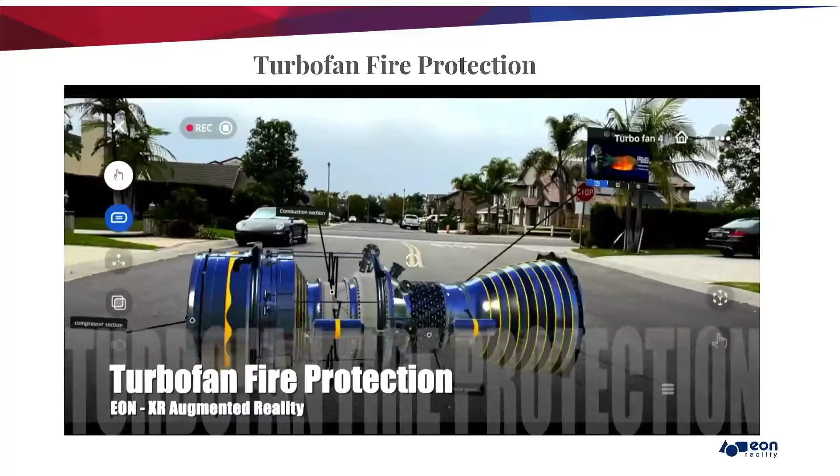So the first thing we're going to show is turbofan engine fire protection. Occasionally something can go wrong with the engine. It can catch fire or give a fire warning to the pilot. So we're going to play this video for a moment. I want you to watch this one.

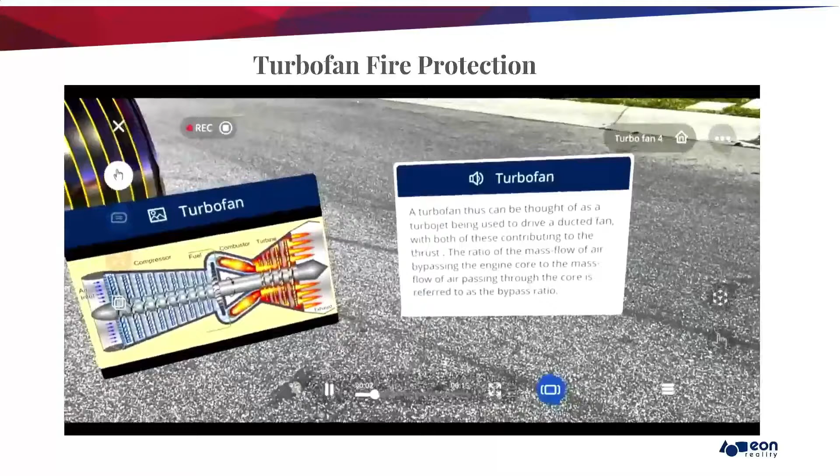A turbofan thus can be thought of as a turbojet being used to drive a ducted fan, with both of these contributing to the thrust.

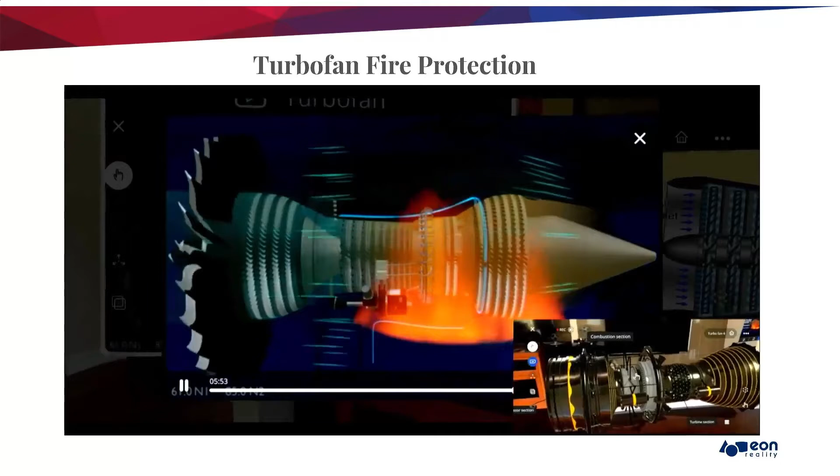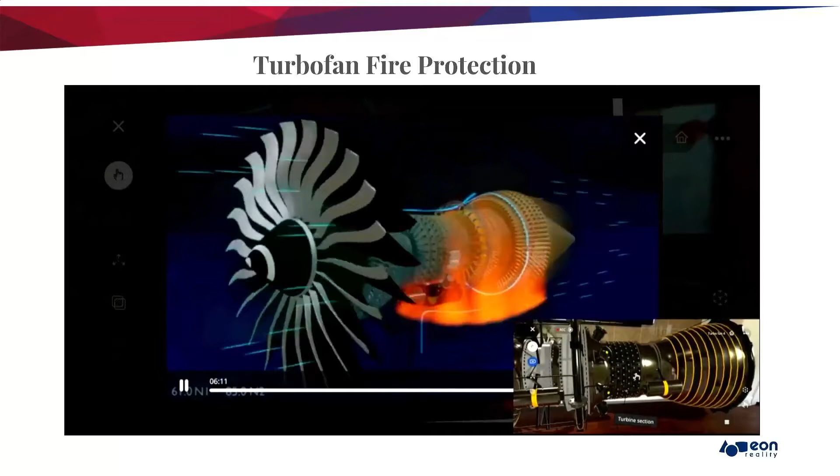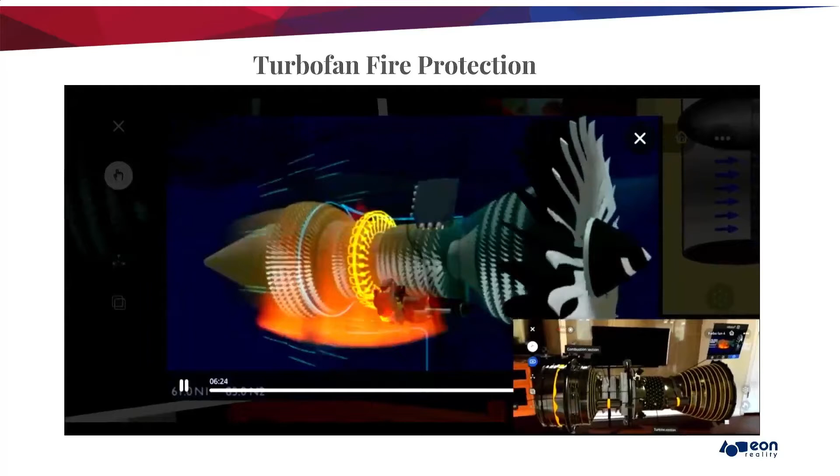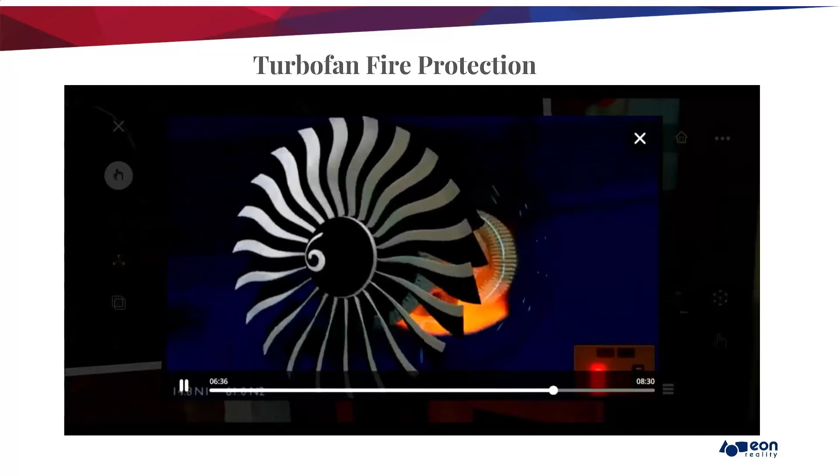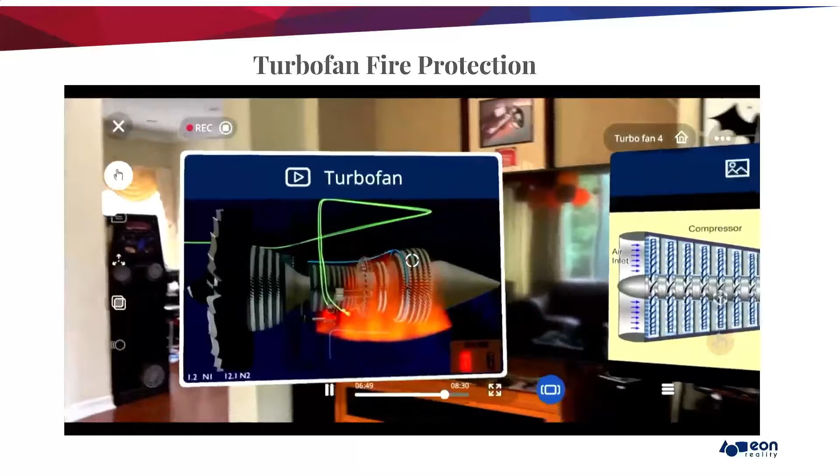Hydraulic supply to the pump is stopped by closing a shutoff valve, and the hydraulic pump is depressurized to stop the output supply. The breakers of the integrated drive generator and the backup generator are tripped. By pulling the switch, the engine is starved of all possible sources that might have caused the fire.

So that's a way of showing a 3D model of the engine and take it apart and show the procedure of what a pilot would do to put out a fire should one occur.

So a fire in any situation, whether it's an engine or anything, you need to starve it of the energy and the source of the fire. So in this case, we shut off the fuel, the hydraulics, the pneumatics, and the electrics. Then the fire is not fed any longer.

If the fire still exists, there's a fire extinguishing system that can be employed in the engine to put out the fire. And I just want to ask you, so for that, how would you look at that now? Is it primarily video or like a book or how?

Oh, it's been a manual. So you read the manual and it says, this is how the system works. You pull this handle and this action occurs. This is the next step and this action occurs. And with this way of learning, it takes you through step by step. It highlights the system that we're talking about so that you don't confuse the electrical system with the hydraulic system with the fuel system. It's clearly depicted. And in the 3D model, you can clearly call that out.

Play the next one. So next slide.

Yes. Oh, a question already. Is that actually directed towards the people flying the plane, or is it directed towards the engineers or future engineers? This would be directed toward the flight crew.

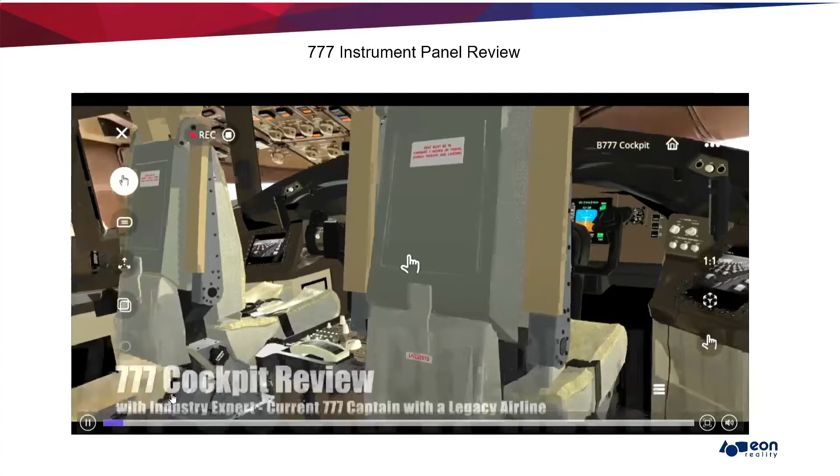So here we have shown a model with... I'm a Boeing 777 captain. In this presentation, we're going to go through the basic layout of the Boeing 777 cockpit.

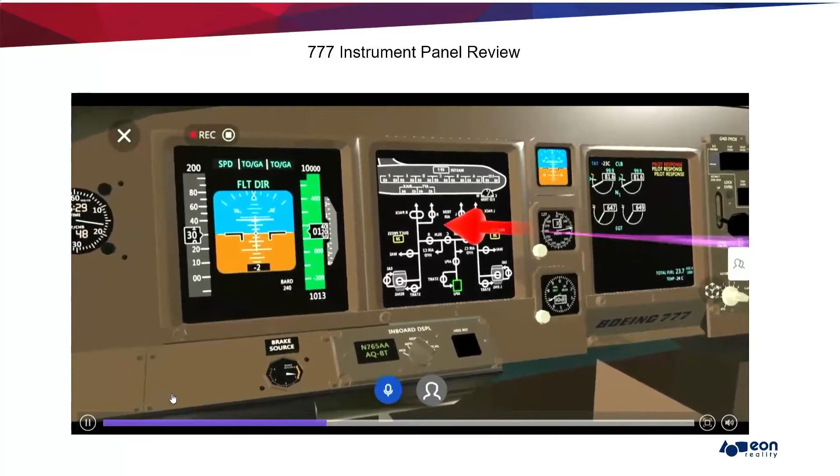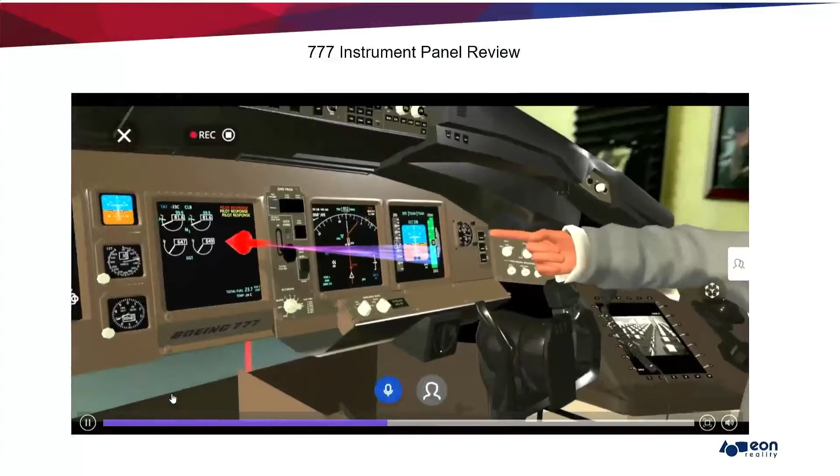Next to the standby instruments, you have the standby attitude indicator, standby airspeed, and standby altimeter. You can do it on your phone. In the center, we have the VR goggles. You can interact in real time with your instructor. The upper EICAS display shows some of the engine control instruments, and also shows the EICAS alerting message system, and the current temperature and fuel load. Next to that, we have the landing gear selector lever.

Next one is Metaverse Builder, Runway. So now we're going to Metaverse Builder, and we're going to learn about runway safety training.

Runway safety training is a very important component of airline and airport operations. There have been a number of high-profile incidents and accidents lately of aircraft landing at the wrong airport, landing at the taxiway instead of the runway, taking off when they shouldn't be taking off, crossing a runway when they shouldn't be crossing the runway. So let's take a look at this, and there will be a little quiz at the end, so please pay attention.

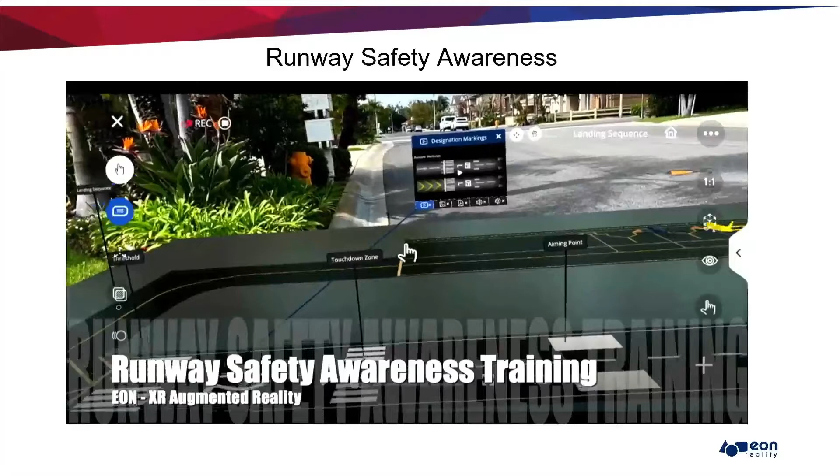Runway Safety Awareness training in augmented reality. There is a focus on what the U.S. FAA terms correct surface operation. This means landing or taking off on the assigned runway and not crossing a runway unless authorized.

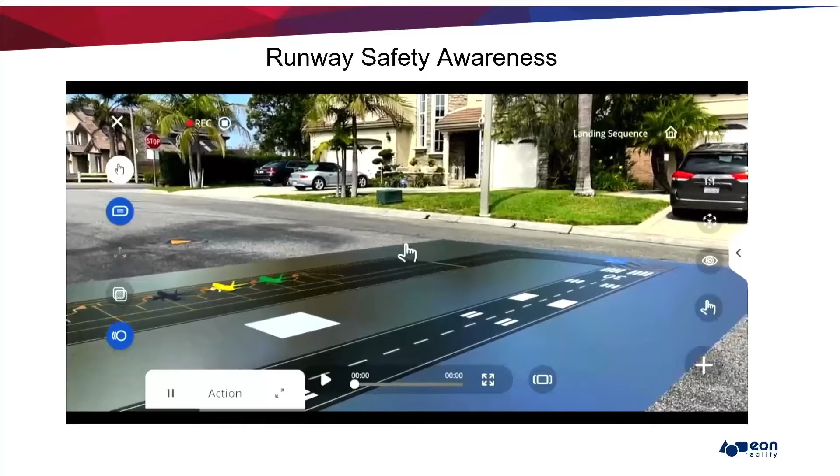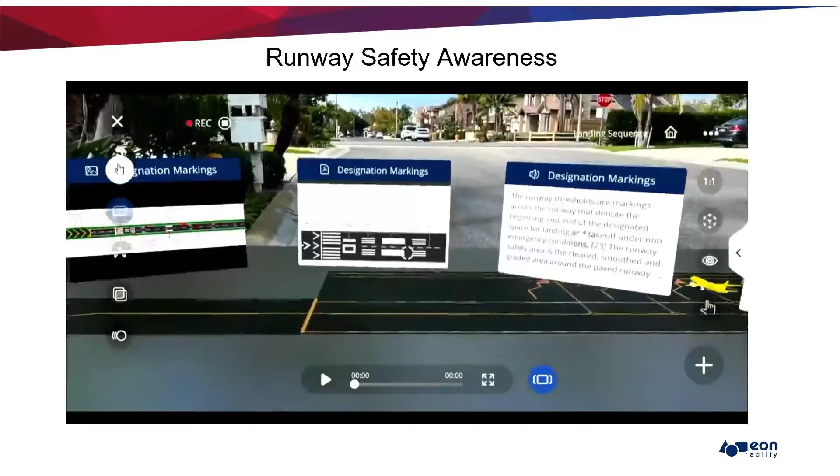Runways are identified by white markings and taxiways are identified by yellow markings. At night, runways are identified using white lights, taxiways are identified with blue lights, and taxi routes are identified with green lights. Here is an example of a typical airport layout in augmented reality. Notice the knowledge portals that we can bring up to show more detail.

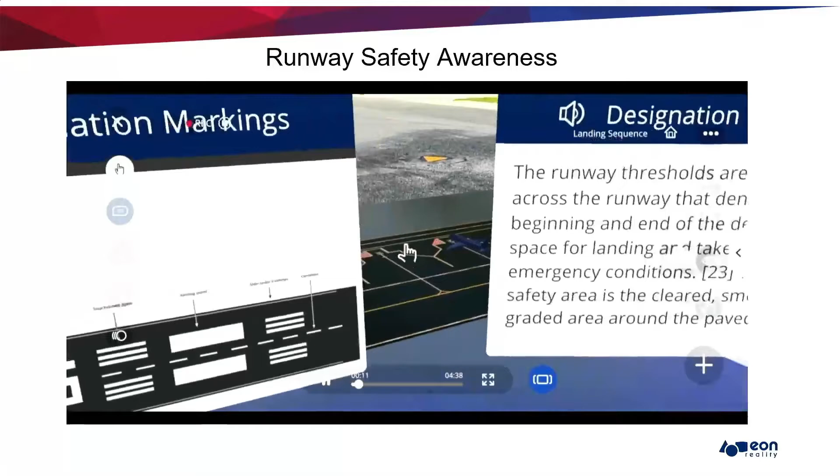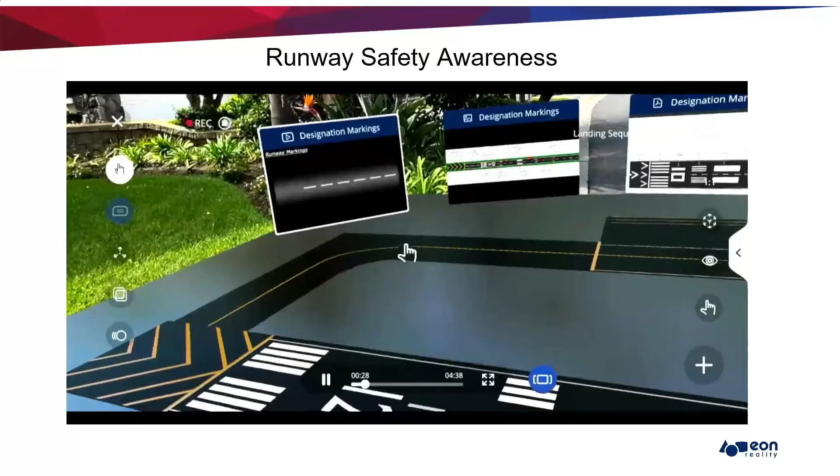Hello, so today we're going to be taking a detailed look at the runway markings that you will find at an airport. So let's get straight into it and start by taking a closer look at a runway. Let's take a look at some of the components that you should find on most runways. First of all, a runway will have a center line, a long dashed white line which runs along the length of the runway. This identifies the center of the runway and also aids pilots with lining up correctly.

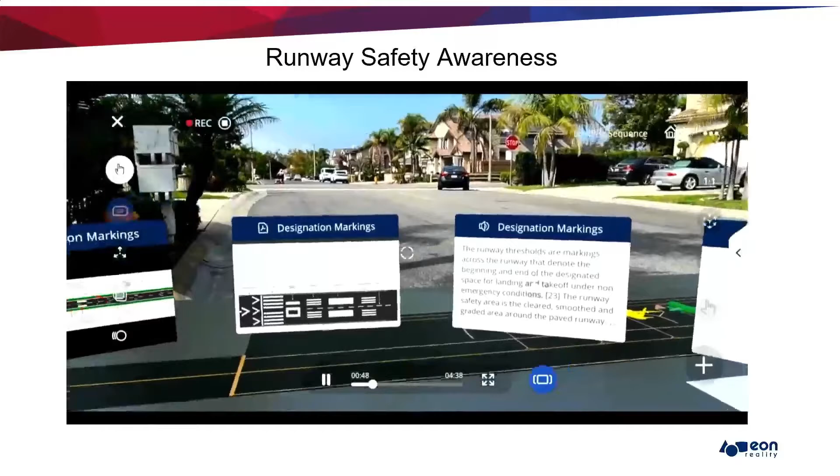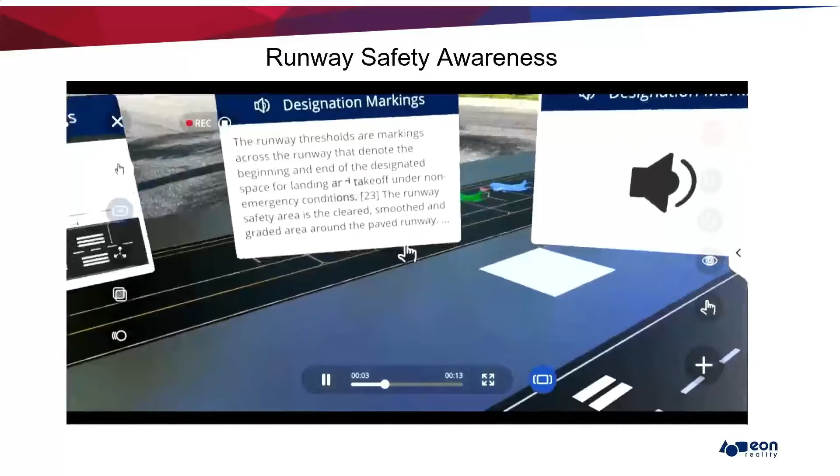Next you have the numbers. Now runways are numbered depending on the direction they face on the compass. For example, if you were stood at the end of this runway, you would be facing east, 090 degrees. You drop the final number and you get the runway number. The runway thresholds are markings across the runway that denote the beginning and end of the designated space for landing and takeoff. This lesson will explain the markings on the runway. The markings are intended as a safe way for pilots to direct their attention while landing an aircraft at an airport.

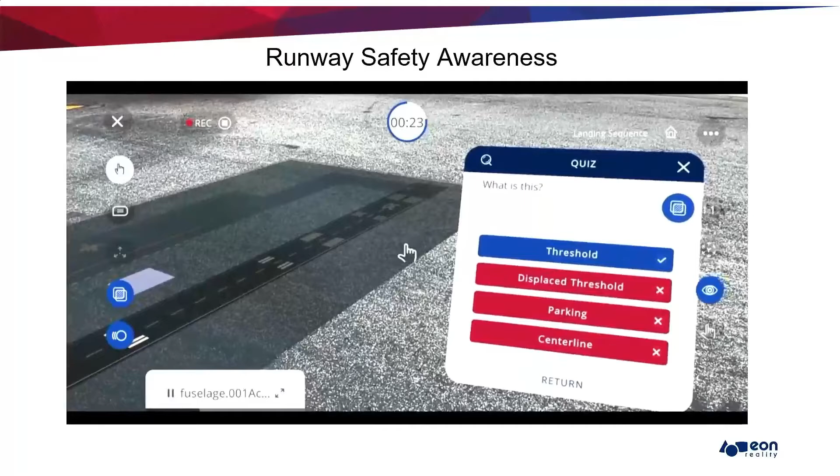So here we can have a quiz at the end. We're asking what part of the runway this is. This is called the threshold. We've correctly identified the threshold.

So here's my quiz for you right now. What color are runway markings and runway lights? White. What color are taxiway markings on the ground? Yellow. Blue is right because that's the color of the lights used at night. And there's one more, green lights. What were green lights? Taxiway routes on the taxiway. So we have a lot of markings and lights on the runway to help pilots take off, land, and taxi around airports in the correct manner. And this is an excellent way to reinforce that at piloting of all levels, even somebody just learning to fly from the beginning, because they have to know this as well.

I just wanted to ask your opinion on the AR, because we did do that in the middle of the street with a kind of giant model, if that perspective is helpful. Yeah, so you can scale this up to even a 1-to-1 scale, so you could walk through it, you could stand on the runway, you could stand on the taxiway, you could walk the length of the runway.

It's something you can't really do at an airport because there are too many airplanes there. But here you could do it very safely. All right, bird strikes.

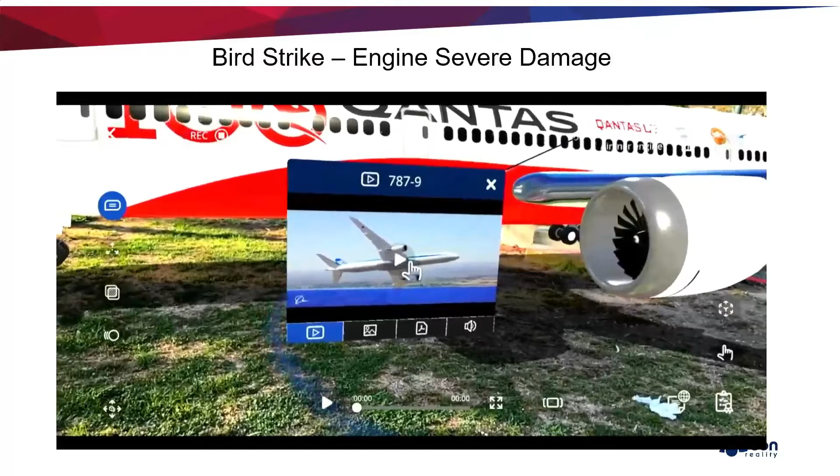So here we have a 3D model of an aircraft that's pretty close to 1-to-1 scale, pretty large. You could walk all around this aircraft. And again, we've inserted some knowledge portals to add some more information.

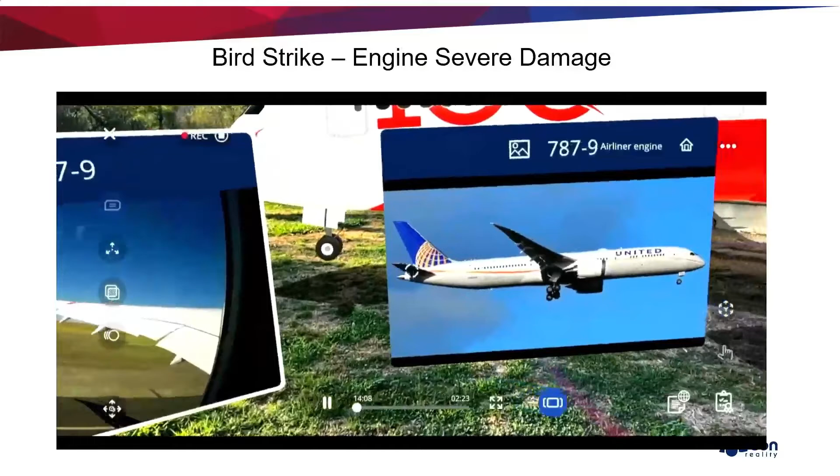Because the focus from EON Reality is on knowledge. The more knowledge we can insert into a presentation, the better it's going to be retained by the student.

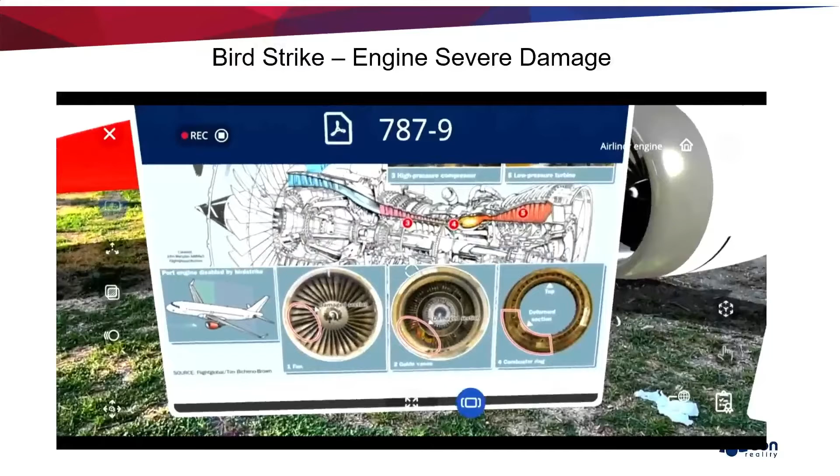So here's some information about what happens to an engine with a bird strike. You can see in the middle photo there, some fan blades missing as a result of the damage.

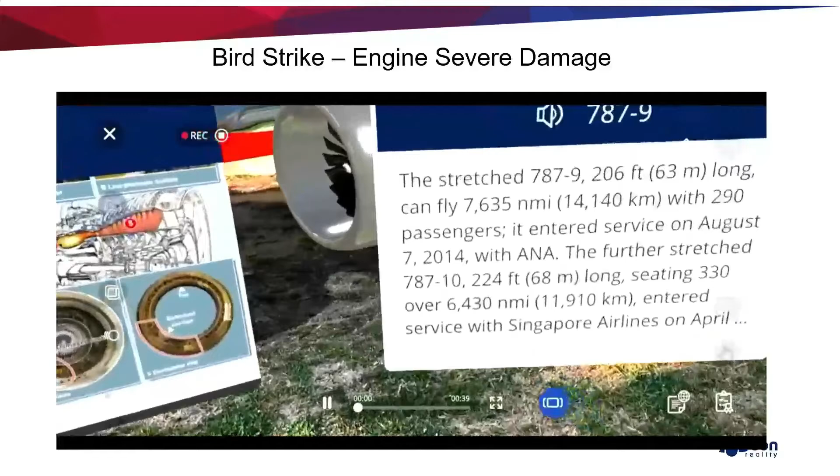787-9, 206 feet, 63 meters long, can fly 7,635 nautical miles.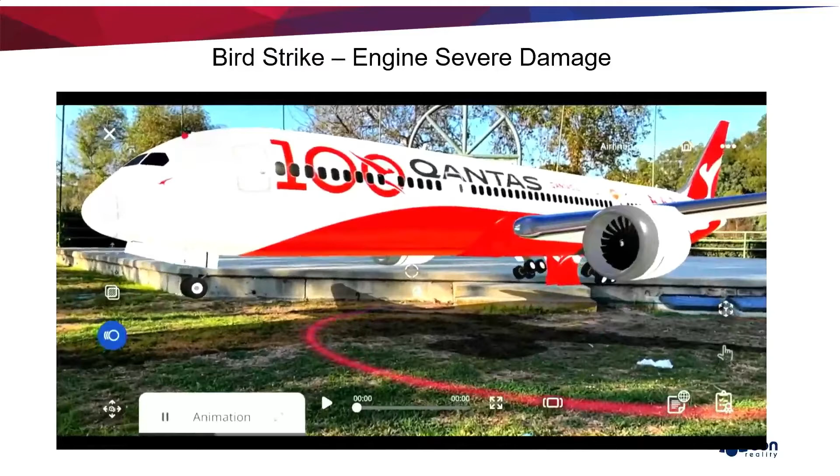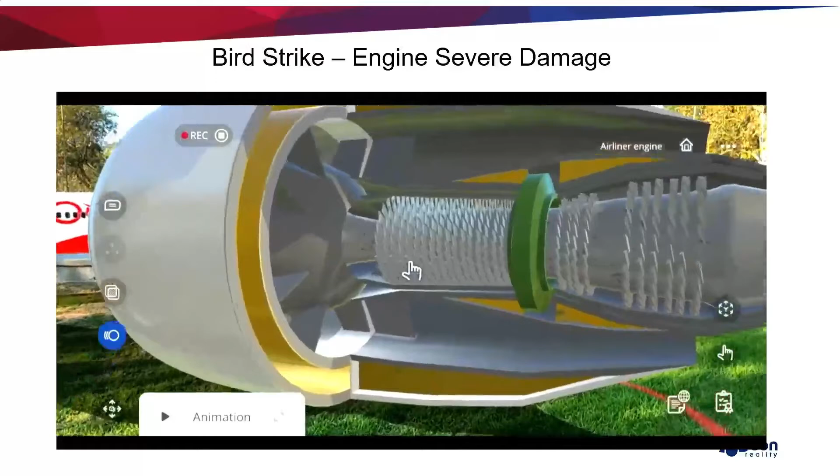So a little bit about aircraft engine design. We can explode the engine, look at an exploded view, or we can simply open it up and take a look inside.

In this video, we will explain the technology behind the jet engine in a logical, step-by-step manner.

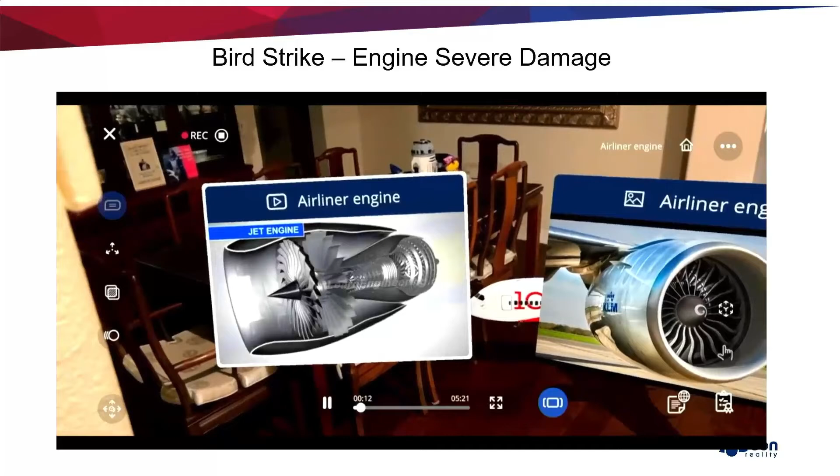Again, we have the knowledge portals, and here's the video of the bird strike scenario in the simulator. Okay, that didn't sound very good.

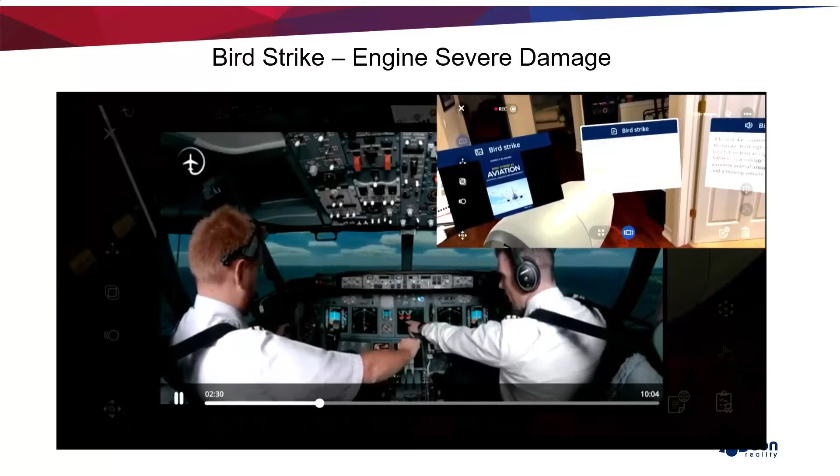Engine. Everything happens pretty quickly when you run into a flock of birds, and you have to react quickly, but in a methodical manner.

I'll be turning right and will request full emergency. More information about bird strikes in the knowledge portal up there. Flaps 40, please. Flaps 30, flaps 40.

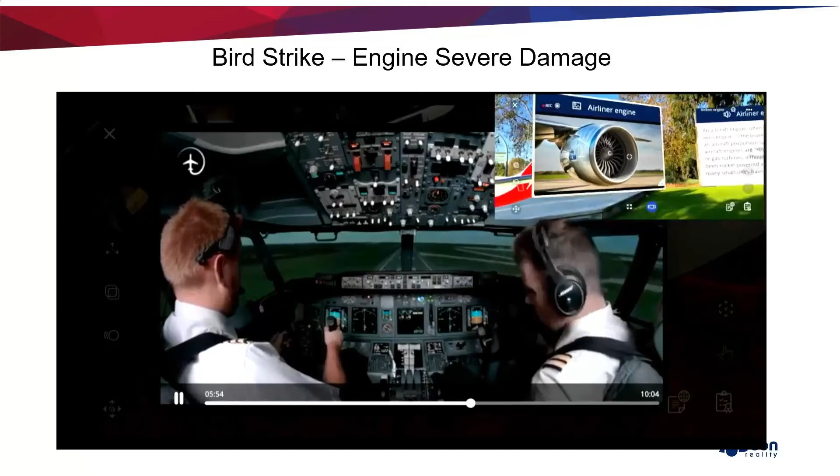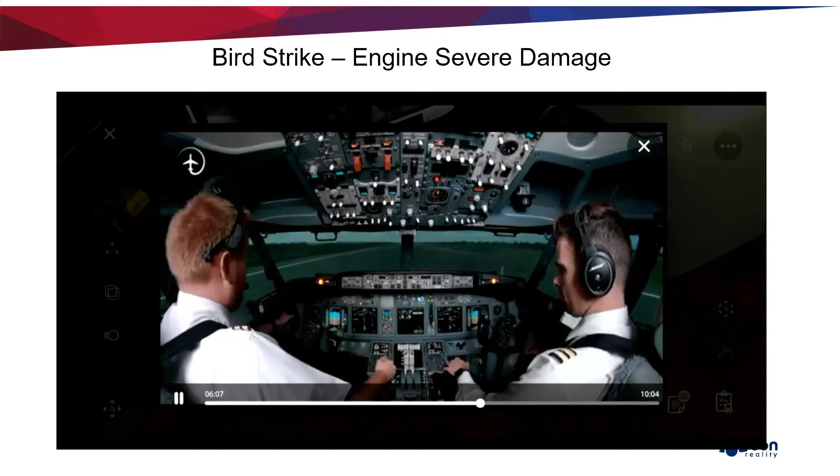So that's a little bit of what can happen when you're out there flying. Hopefully not very often. When it does, you usually read about it, and you usually read about it because the pilots were well trained and they landed the aircraft safely.

So that's a way of showing the Metaverse Builder. And so one more we're going to show is the fun thing for me, the float plane training. So float planes are different from land-based airplanes because they're on a float.

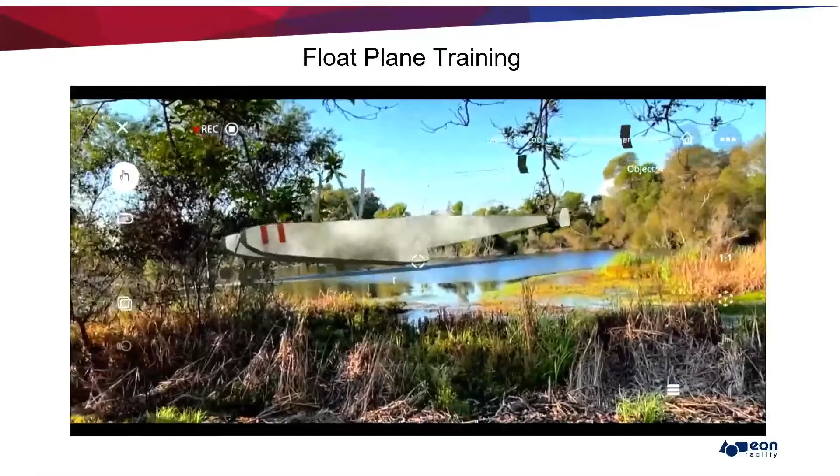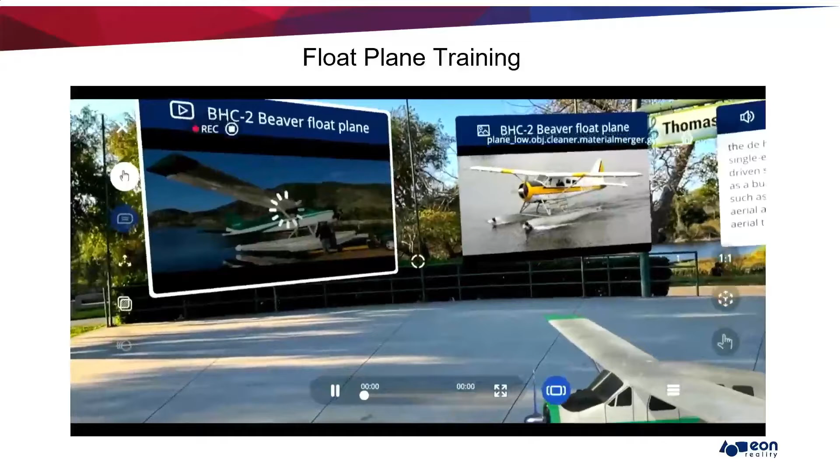There's several kinds of aircraft floats. There's floats we call straight floats that have nothing below them, so they land only on water. We have amphibious floats, such as these, that are floats that have wheels, so you can land on airports or on the water. There's seaplanes that use the hull as the landing surface, and amphibians, which use the bottom of the aircraft to land on the water, but also have wheels that can land on the airport.

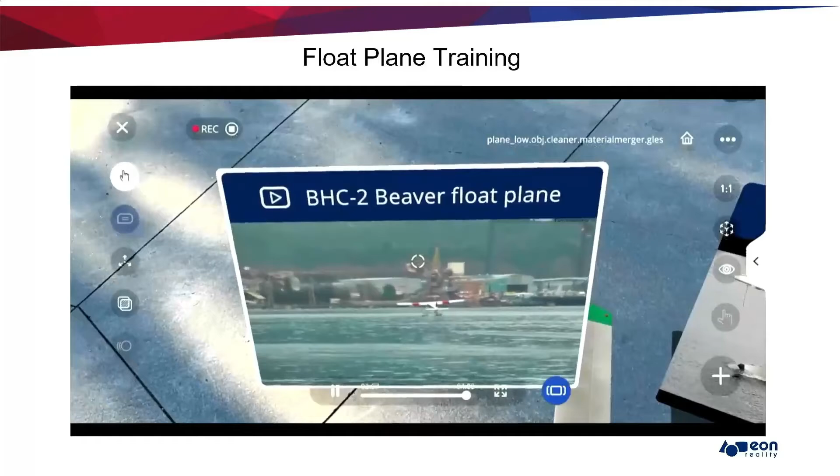So here's some knowledge portals about flying float planes. DHC-2 Beaver, made in Canada, the most popular one. These are in extensive use in Canada and in Alaska in the United States.

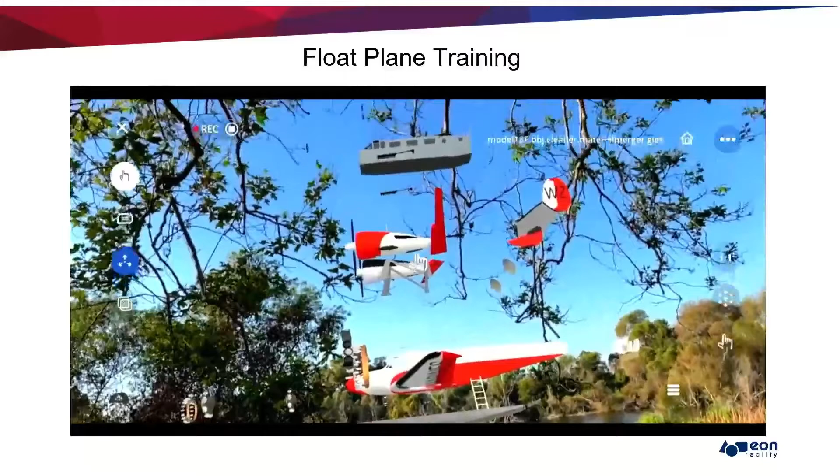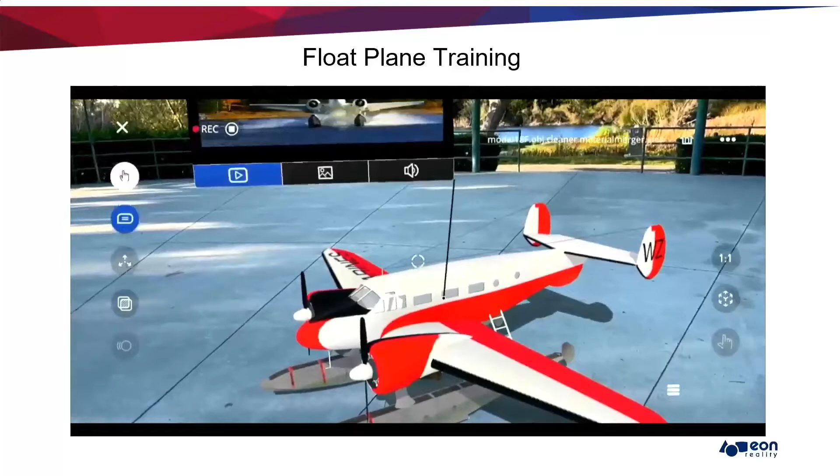Here's another one. This is the Beechcraft Model 18 twin-engine airplane on a float, and we can explode the model of the Beech 18, again at 1-to-1 scale. So you could walk around this, you could look under the wing, you could look at the engine, and again, some knowledge portals.

Going to show one here about what it's like to fly one of these. So this past October, I had the opportunity to spend a weekend at Sky Harbor with Lake Country Air. This particular opportunity was to get a multi-engine seaplane rating in a Beech 18.

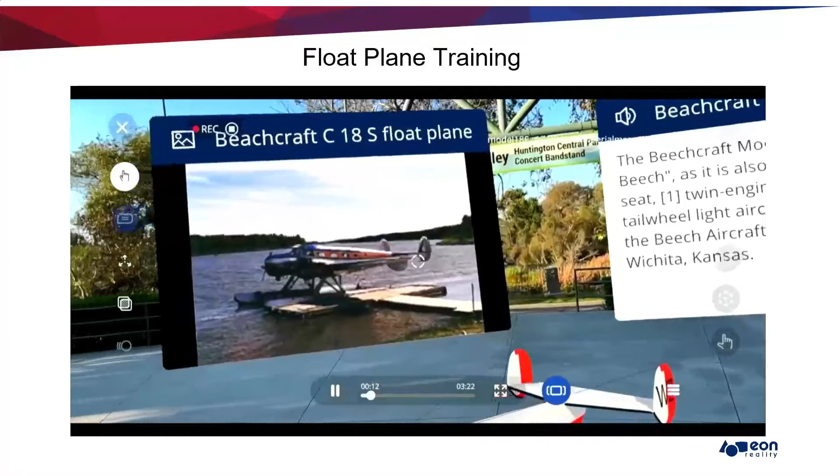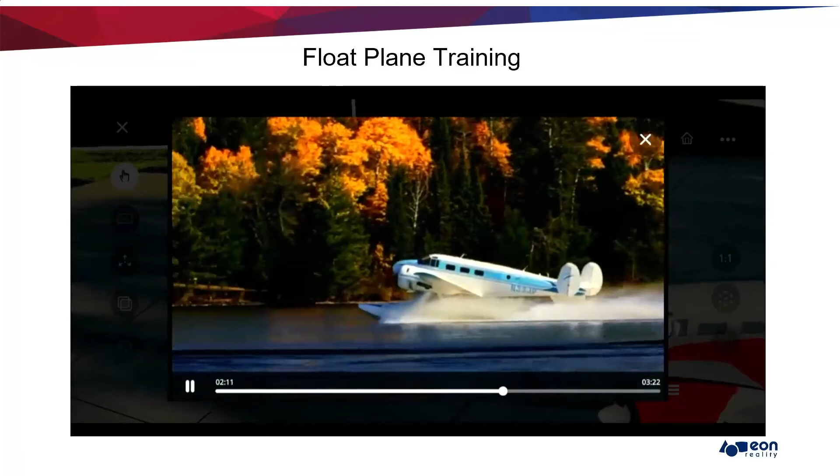I guess if anything surprised me about the way it flew, it was how easily the twin Beech came off the water. Very deliberate, very positive movement as it comes off the water. My only comparison is a Super Cub on amphibs that I fly quite a bit when I get to see the seaplane flying. The Beech was much more stable, much easier to fly, quite frankly, on and off the water than a Super Cub on amphibs.

So that's some seaplane operations. That's the last one. I think that's the last one. Oh, this says TBM, oh yes, okay. So next we're going to talk about

MRO, maintenance, repair and overhaul, aviation. This is for the technicians. Somebody was asking about technicians. Regular maintenance needs to be performed on this aircraft by certified aviation technicians to keep it in running order. Some of these items include annual inspection, oil changes, and service bulletin compliance or airworthiness directive compliance.

So again, there can be quizzes embedded here.

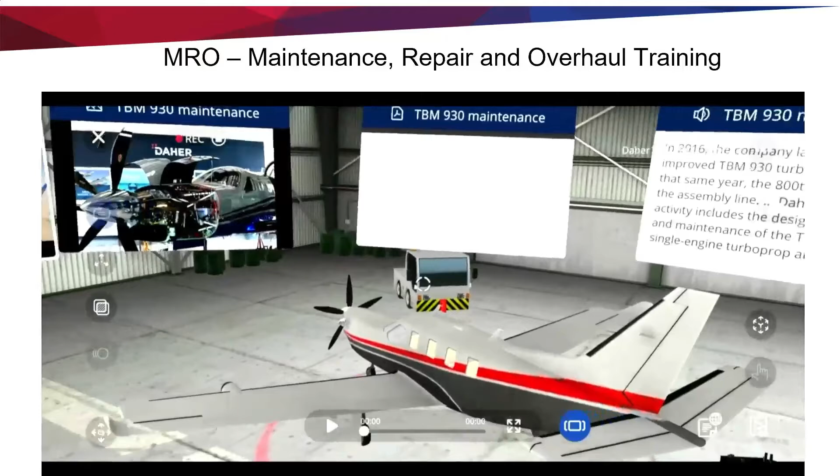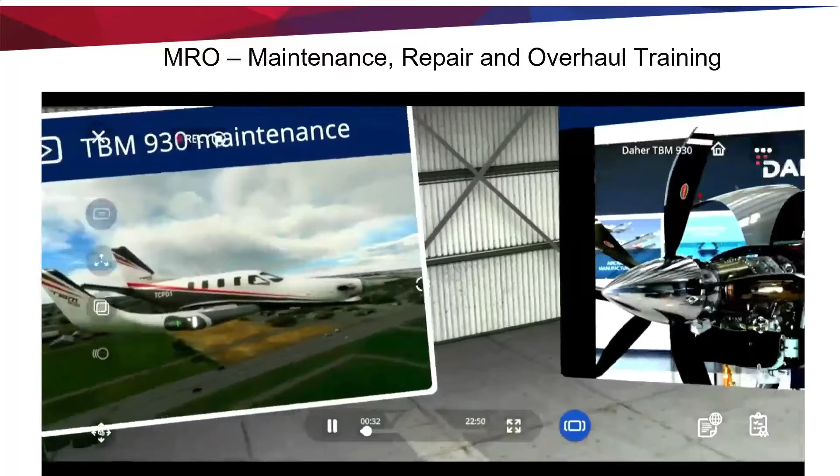This shows what we call the TBM 930. It has a Pratt & Whitney turboprop engine with 850 horsepower, a service ceiling of 31,000 feet, and over 1,700 nautical miles of range. In 2016, the company launched the improved, more powerful TBM 930 turboprop aircraft. That same year, the 800th TBM came off the assembly line.

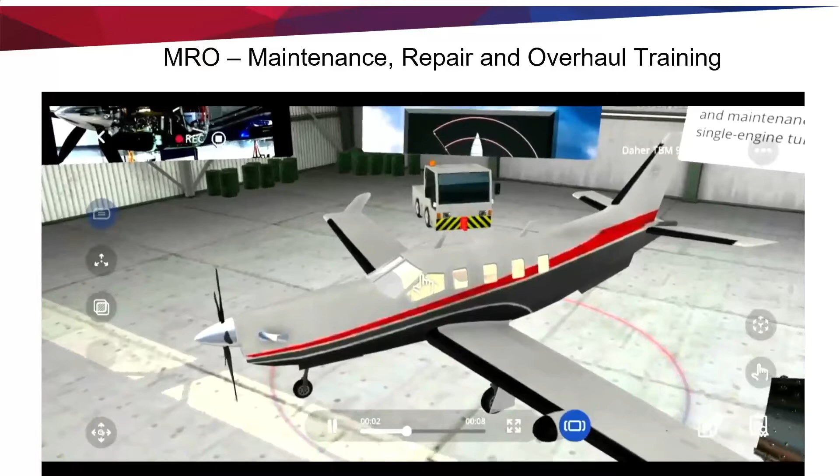Our aviation activity includes an X-ray view of the design, or an exploded view of the aircraft. This is a TBM 930 aircraft, used as a leader in business aviation. And we're looking inside the virtual hangar as well, so we can modify anything, move anything around, whatever we'd like to do. That's the last one. So I have one more presentation for you.

This is on airport operations. So we all go through the airport. You go through security, you go through passport control, you make your way to your gate, and you get on your aircraft. But what about when they design a new airport, or they want to design a new passenger facility?

We've got a relatively new airport here in Istanbul. So that had to be designed and thought through, where the passengers are going to flow, where the airport workers are going to flow, where the baggage is going to flow.

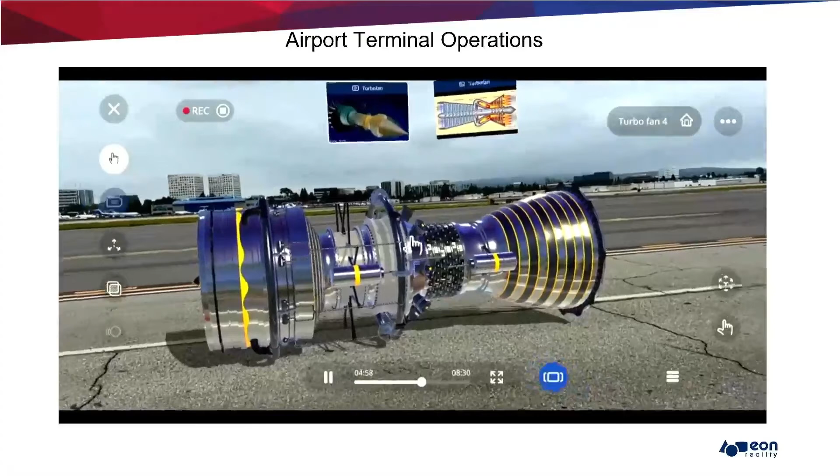Here's an engine with an exploded and an X-ray view, and there's the actual airplane right behind it. And again with some knowledge portals. Engine still remains the most hazardous zone on the aircraft. And here's the part about the engine, and here's the part I wanted to show.

Thank you. I think that was super different. I was going to say, now for something completely different. Really appreciate you giving us kind of concrete examples in the area of aviation. So with that, I'd like to see if there's any questions on creating these.

Yes. Might need a mic. Is there questions there? Questions? Okay. Anybody have any questions on creating these or anything about aviation? It's so quiet over there.

Okay, so we have the virtual reality, augmented reality, metaverse builder, all used in the aviation context. So thank you very much. All right, thank you. Thanks for doing that.